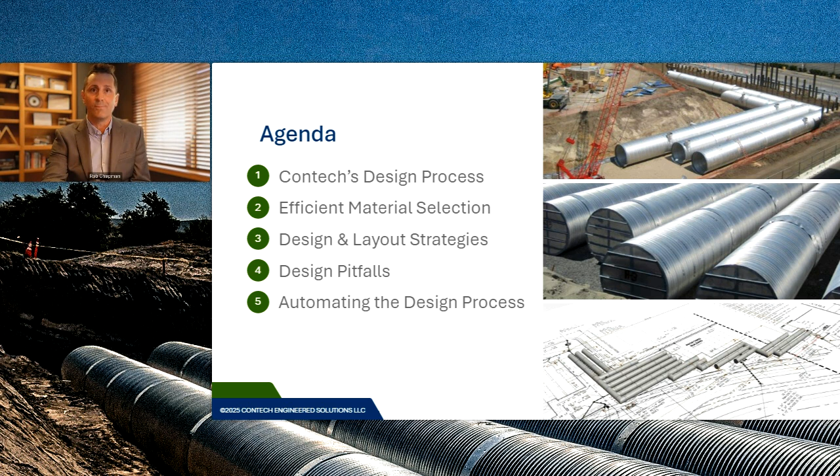Contech offers a wide range of innovative, flexible stormwater solutions engineered to solve your site's unique challenges and reduce long-term maintenance costs. From traditional BMPs to LID solutions, our ongoing investment in robust laboratory and field evaluations ensure a variety of solutions to comply with local regulations, so your projects get approved that very first time.

So the Contech difference. What is the Contech difference? First, collaborative design support. Stormwater management and infrastructure design require more than just selecting the right products, being quick about that. It requires smart, informed, engineered solutions that align with site conditions, environmental factors, and regulatory requirements. At Contech, our support begins long before the installation. We work closely with engineers and project teams to develop optimized designs that not only meet the project challenges, but also improve performance, efficiency, and sustainability.

Our team provides expert design guidance, helping engineers tailor solutions to unique site conditions, technical consultation, working through complex challenges with hands-on expertise and real-world insights, optimized engineering, ensuring that designs meet maximized efficiency, reduce costs, and compliance standards. We're committing to deliver the most effective solution for your project needs. Speed and accuracy in an industry-leading portfolio. So when your deadlines are tight, accuracy is critical. Contech delivers there. Our ability to provide optimized designs in a trusted product environment ensures projects remain on track while meeting compliance and efficiency goals.

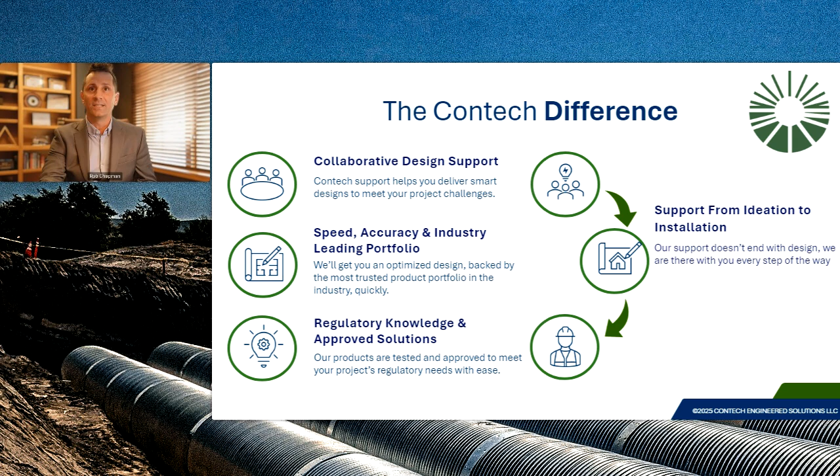So you can store water, detention, and infiltration a variety of ways. What are the benefits of going underground with your product selection?

While underground detention often does have a higher upfront capital cost than a pond, efficient underground storage can provide long-term benefits, such as additional parking or building space, driving your commercial returns over time for your clients.

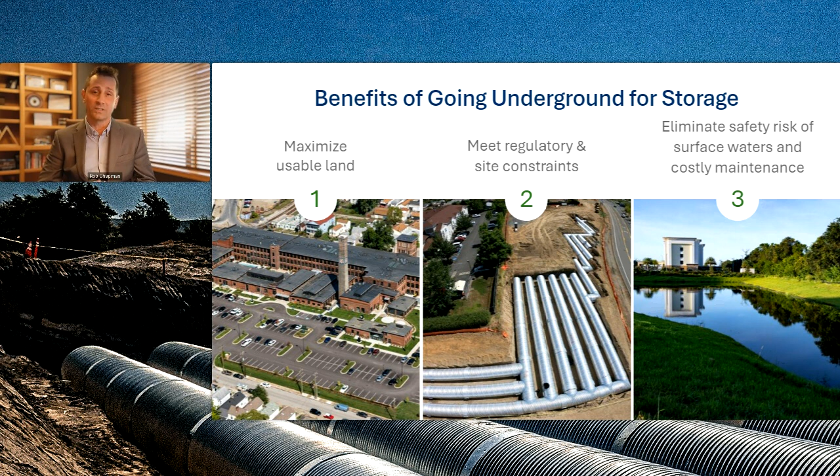It allows you to easily meet regulatory requirements and design around unique site constraints. And then it's a safer alternative to surface water, with a much more reasonable maintenance cost and schedule. Underground detention also means greener areas for parks and rec if you're not looking to maximize that commercial space.

So now we're going to get into efficient material selection and discuss our products and some key factors for consideration. When it comes to selecting the right material for underground detention or infiltration, there's no one-size-fits-all answer. These are the factors the team identified to make smart, site-specific decisions that balance performance, budget, and long-term reliability.

First, we're going to start with storage volume and your available footprint. Every site has different space constraints. Some are tight on surface area but offer more depth. In these cases, systems that can maximize vertical storage become incredibly valuable to clients, helping your volumetric requirements get met without expanding your site's impact.

Second, you have to consider site conditions: construction loading from the get-go, structural loads, traffic ratings, and depth to the water table.

And then on to cost and layout flexibility. We discussed upfront material price—that's always a factor. The ability to custom fit your system into an irregular footprint or constrained area can reduce complex site work and avoid expensive redesigns and timely process changes. You can plan around total install costs with efficiency.

Fourth is durability and service life. You want to choose a system and a product that's not only affordable today, but that's going to give you that performance for decades with minimal maintenance and no surprises down the road.

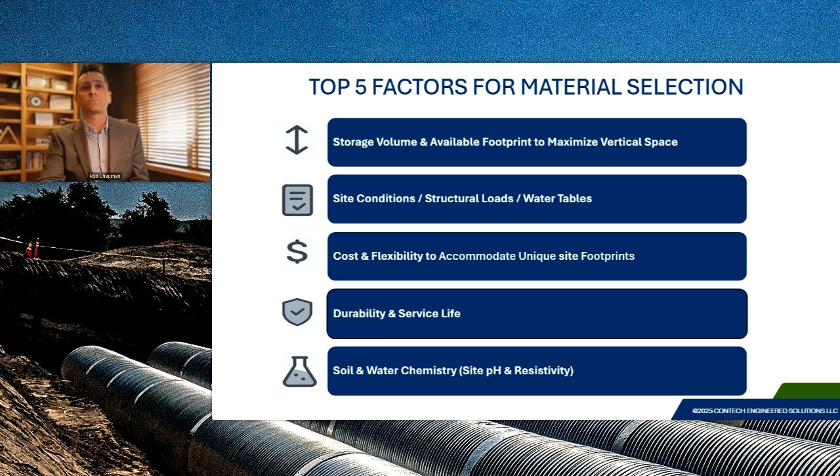So on to the products. Contech offers a variety of underground detention and infiltration solutions. We have concrete products, metal and plastic, and hybrid products for efficiency to solve a variety of site conditions and requirements, ranging from watertight requirements to infiltration requirements, shallow to deep, tight urban sites to high volume storage needs.

So we'll start with chambers, ChamberMaxx. ChamberMaxx is Contech's polypropylene chamber system specifically designed for shallow cover and space-constrained sites. A perfect fit for urban, commercial, and institutional projects.

Each chamber features a 51-inch span by 30-inch rise, delivering 75.1 cubic feet of storage per chamber—that 0.1 is really important. One of the key advantages of ChamberMaxx is its open bottom design, which supports runoff reduction, groundwater recharge, and volumetric control. ChamberMaxx is also a cost-effective solution for shallow applications.

And finally, getting to the structural stuff, ChamberMaxx meets ASTM F 2418, and supports HS20, HS25, and even HL96 live loading, making it suitable for traffic-rated applications without sacrificing reliability.

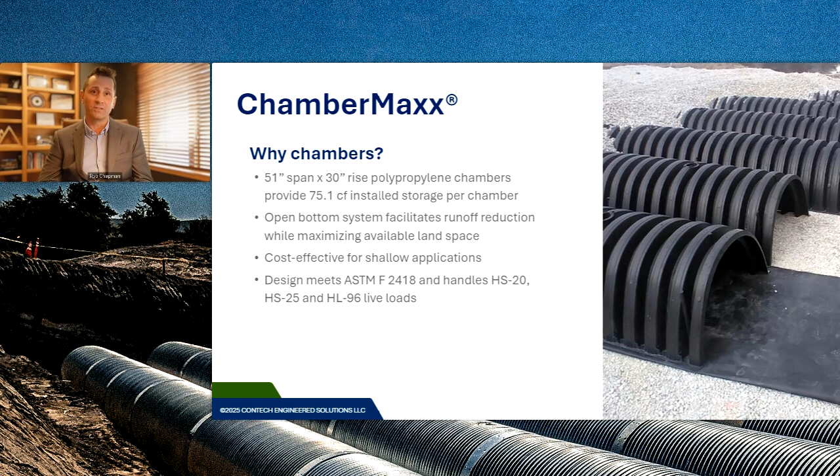And now on to DuroMaxx. So many of you may have used this in conveyance projects.

DuroMaxx is a standout solution when you need strength, durability, and watertight performance, especially in environments where traditional materials just don't hold up. I'll brag a little on CMP there. It starts with the steel reinforced ribs, which provide the structural backbone needed to support large diameters. We can produce from 30 inches all the way up to 120 inches. This allows DuroMaxx to handle deep burial, high traffic loading, and large volume conveyance with ease.

What sets DuroMaxx apart is its combination of strength and corrosion resistance. The HDPE shell encapsulating those steel ribs resists corrosive soils and contaminated runoff, making it a top-tier choice for industrial sites, urban fill areas, and projects where longevity in harsh conditions is a must. We'll talk about that in a case study at the end.

When watertight performance is non-negotiable in applications like rainwater harvesting or containment systems like glycol, DuroMaxx delivers. The bell and spigot joints are rated to 10.8 PSI, meeting strict standards for leakage and system integrity.

If you need to get even more critical with bottle-tight applications, we offer multiple joining solutions. Welded couplers have been around for a while, are still available today, and continue to be a trusted option for maximum performance. But for those who don't know, we're excited to announce the all-new Quick Joint, a major innovation we just made here at Contech and Quikrete that brings speed, simplicity, and security to DuroMaxx installations. This joint is very cool. It's engineered for both sanitary and storm sewer applications, and we expect it to become a staple in the market thanks to its ease of use and high performance under pressure. So DuroMaxx brings the strength of steel and the durability of plastic into a single system, and many of the design practices are similar to CMP with DuroMaxx.

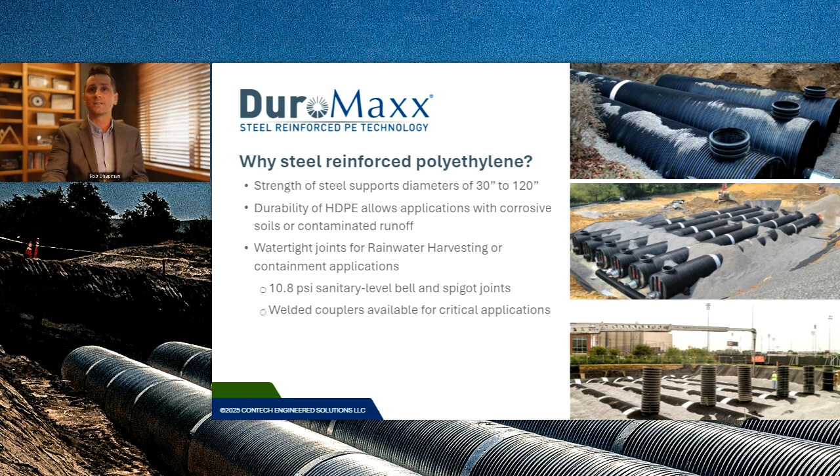Onto our concrete detention products. When space is at a premium, like in dense urban environments, Southern California, designing effective stormwater management can be a real challenge. That's where Contech's Urban Pond system shines. It's purpose-built for tight urban sites, maximizing storage in a minimal footprint. Whether you're working with a parking lot, a plaza, or a street, Urban Pond gets you high-capacity storage with concrete detention without disrupting the surface above.

Each module is 8 feet by 16 feet, and the system heights are customizable from 3 to 14 feet, giving engineers and developers incredible flexibility to meet site-specific volume needs without over-excavating or redesigning the entire plan.

In terms of structural performance, this is where concrete shines. It's just as versatile. With only 1 foot of cover, Urban Pond handles HS20 or HL93 loads, and with 18 inches of cover, you're getting that HS25 live loading requirement set. It makes it suitable for heavy loading in urban roadways or commercial developments.

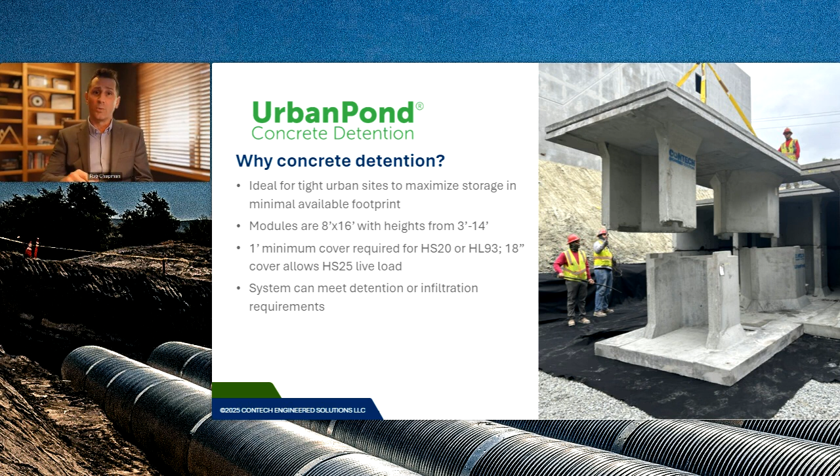And finally, Urban Pond can be configured for detention or infiltration. Depending on your site's hydraulic goals, if your goal is to slow runoff or recharge groundwater, Urban Pond gets you a reliable, long-term solution.

And then on to the old CMP, the new CMP, as we'll discuss in a little bit. Each product has its strength, and depending on the site's goals and constraints, there's usually a fit for everything. But when it comes to striking that balance between those 5 key factors we discussed—cost, flexibility, performance—corrugated metal pipe, or CMP as I've been referring to it, really stands out.

CMP detention and infiltration systems offer the widest range of sizes, shapes, and material coatings in the industry, which makes it incredibly versatile across all regions of the United States and all project types. So whether you're dealing with shallow cover, tight footprints in commercial projects, or aggressive soils, there's almost always a solution that fits, and fits economically. Let's take a look at why CMP is the go-to for engineers without worrying about compromising on design flexibility.

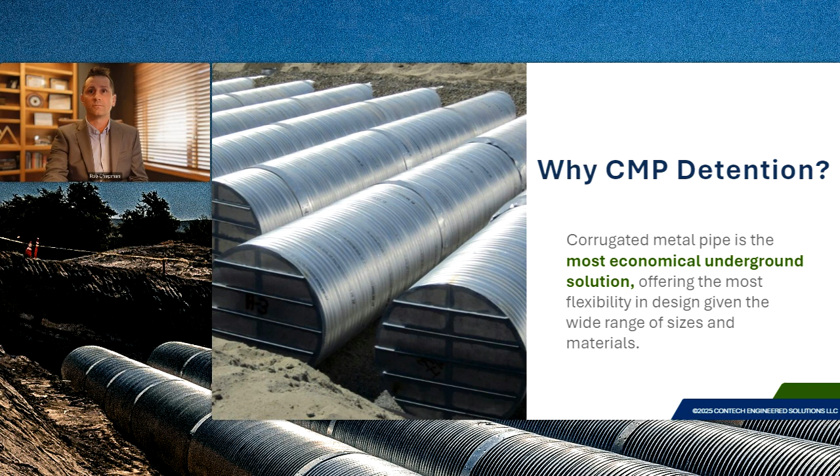Flexibility in design—when we talk about that for underground detention and infiltration, CMP stands out, especially on sites with tight constraints. You're going to hear that word a lot. And then there are competing priorities for land use, like green areas and commercial development efforts.

First, custom configurations are a major strength with CMP and also DuroMaxx. Systems can be fabricated to spec, so custom Ys, Ts, and elbows mean they can be laid out to almost any footprint. It gives us the ability to navigate around existing utilities and difficult easements. Secondly, there's a wide range of gauge and corrugation options, meaning you can design for a variety of site conditions and structural loading needs.

CMP can be produced in 12-inch all the way up to 144-inch in diameter and can handle anything from small urban systems to large-scale industrial warehouses and data center storage requirements. And then the flexibility continues with access risers, manifold placements, inlets, and outlets. So with CMP DuroMaxx, you're not limited to preset configurations. We can place access points, inlets, and outlets wherever is needed for inspection and maintenance, which helps with long-term system performance and safety as well.

And then outlet control structures such as orifices, internal weir walls, they can all be designed using our DYO software we'll get to. Custom configured in the system, you can avoid the need for external structures that are out there. So overall, the design flexibility that you're getting with our pipe products maximizes space, meets performance goals, and then reduces installation complexity while getting you that cost efficiency that you're looking for.

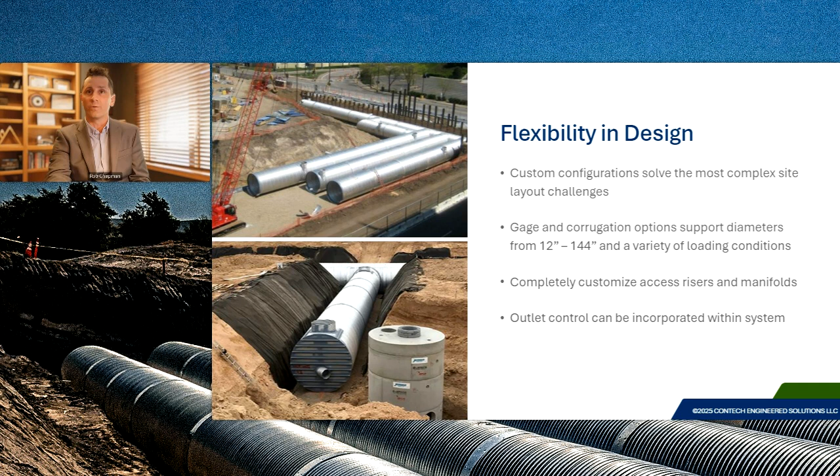So when it comes to material selection, it's not just one coating that's out there. The go-to is aluminized type 2, offers excellent long-term performance for most soil conditions. When you're dealing with more aggressive or corrosive environments, we will recommend going all the way to that polymer coated product if you're looking for enhanced protection, extended service life, that 100+ year range. So choosing the right coating ensures the system's not only cost efficient up front, but it's going to get you that durability and CMP you're looking for the long haul.

Many of you don't know this, but approximately 75 to 80% of the soils in the US are now suitable for aluminized type 2 metal pipe when it's used for underground storage and infiltration applications. In recent years, there's been a drastic shift. Many of you know that galvanized product that's out there. The majority of UDS designs now incorporate aluminized type 2 due to its enhanced performance.

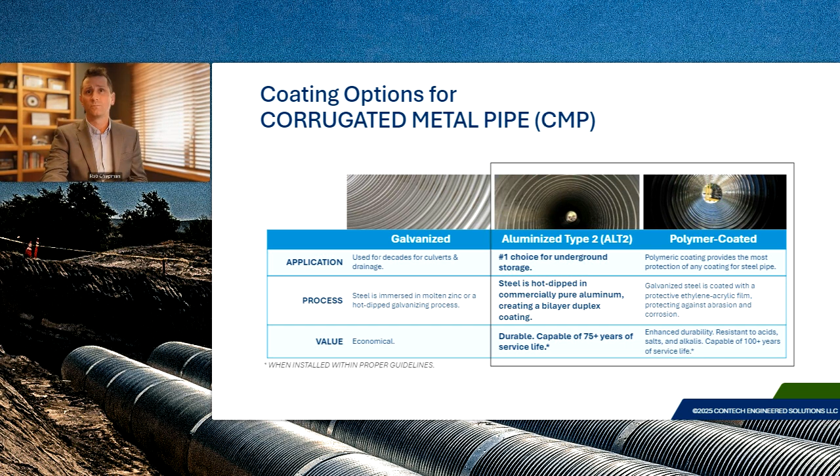And the last thing we'll talk about with type 2 pipe, it's important to clarify that it's not just steel. What we're really referring to is aluminized type 2, which has been proven for over 60 years through research, real world field performance, and a wide range of applications. It's been studied by national entities, and there's reports out there that our team can get you. So why is it so widely trusted? It comes down to that aluminum alloy coating, which provides superior corrosion resistance in acidic and moderately aggressive soil. Looking at a soil profile with pH between 5 and 9, and resistivity above 1,500 ohm centimeters, it's going to get you a strong, reliable solution.

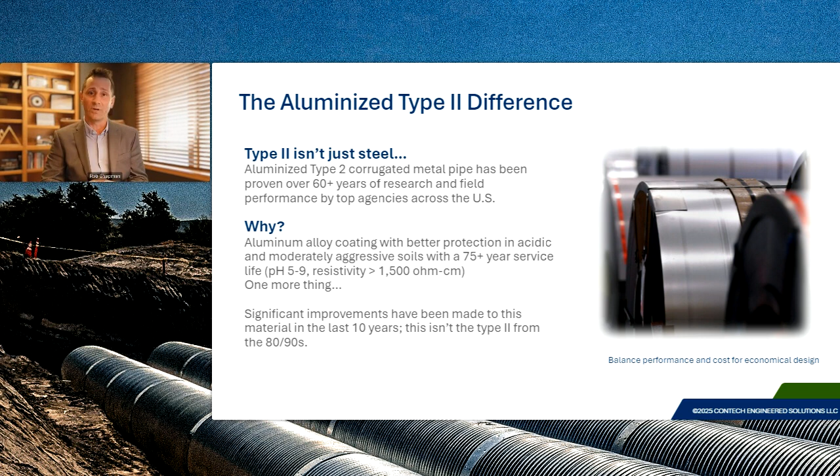One thing that many folks don't realize, even many here at Contech, is aluminized type 2 CMP isn't the product of the 70s, 80s, and 90s. Over the last decade, with technological improvements and quality control measures, suppliers have made significant coating improvements in quality, consistency, uniformity of the corrosion aspects, and forming. So the material properties are much different than they were a few decades ago.

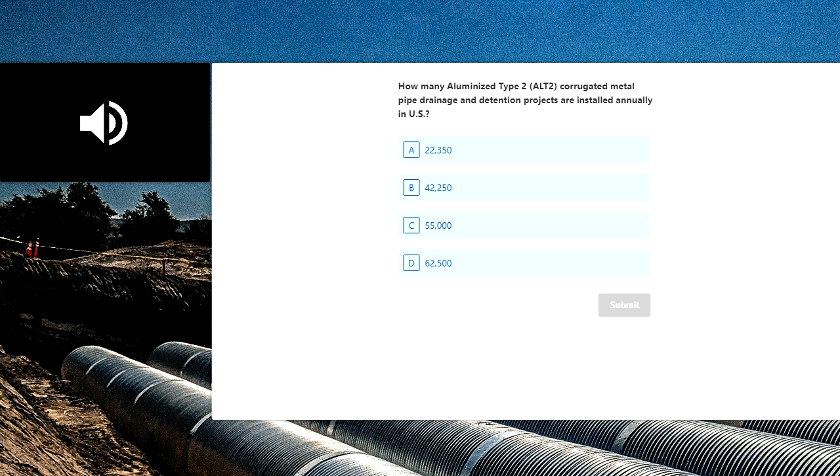Here's our first question. How many aluminized type 2 corrugated metal pipe drainage and detention projects are installed annually in the United States? Is it 22,350, 42,250, 55,000, or 62,500? I'll give you some time now to mark your answers.

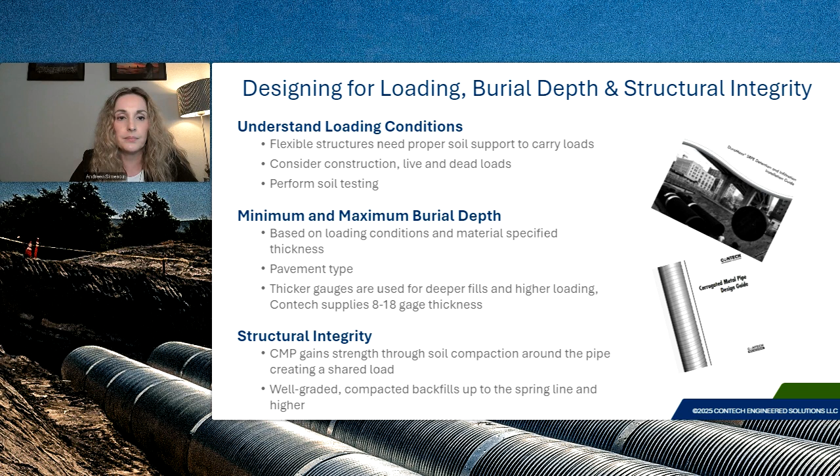The goal of any CMP detention system should be to maximize the vertical space available to minimize that overall footprint. This will reduce the material, the excavation, the backfill quantities, and the labor costs. Increasing the depth of the system allows for a smaller footprint while storing the same amount of water. The required volume is a fixed number that doesn't change, and it is based on local regulations, and designing a smaller system will always yield a more economical solution overall.

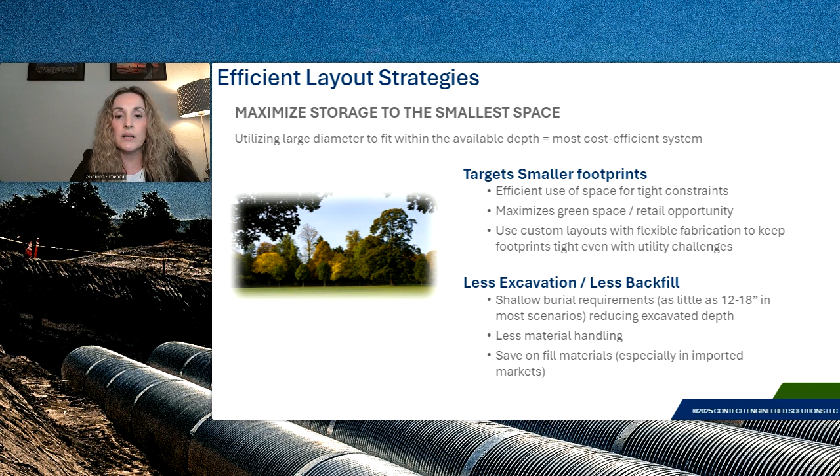The CMP system requires a minimum cover to withstand typical traffic loads, ranging from 12 inches to 18 inches, depending on the diameter of that pipe. You need to account for this minimum cover when designing and choosing the appropriate diameter for the system.

Doubling the diameter of pipe from 48-inch to 96-inch gives us 4 times more storage volume per foot of pipe. This provides significant cost savings per cubic foot of storage once you consider both the material cost and installation cost. This is a very important concept. Going larger means less material to ship and install, less excavation because of that smaller footprint, and also less backfill material.

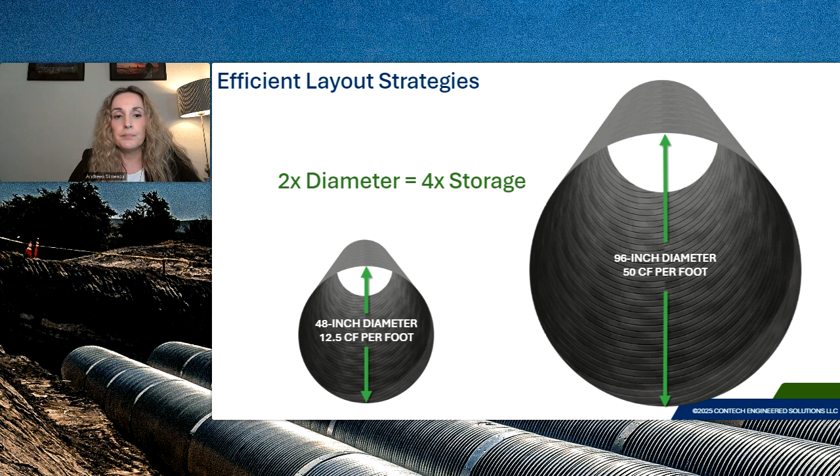Now let's go through this quick example where we are comparing 3 different systems: the Chamber Maxx, a 48-inch system, and a 96-inch diameter system, all designed to store some of the volume in the surrounding stone backfill. The storage volume requirement in this example is 20,000 cubic feet. We have about 10 feet of depth to work with and a footprint of 100 feet by 100 feet. As you can see here on the slide, the 96-inch system significantly reduces the footprint, which ultimately will also reduce the excavation quantities and stone backfill quantities.

Construction costs vary from region to region, but if you look at both material and installed cost, you will see the largest 96-inch system becomes the most economical of the 3. As the volume gets larger on projects, the savings will also increase, and you could see savings of up to 30 to 40%.

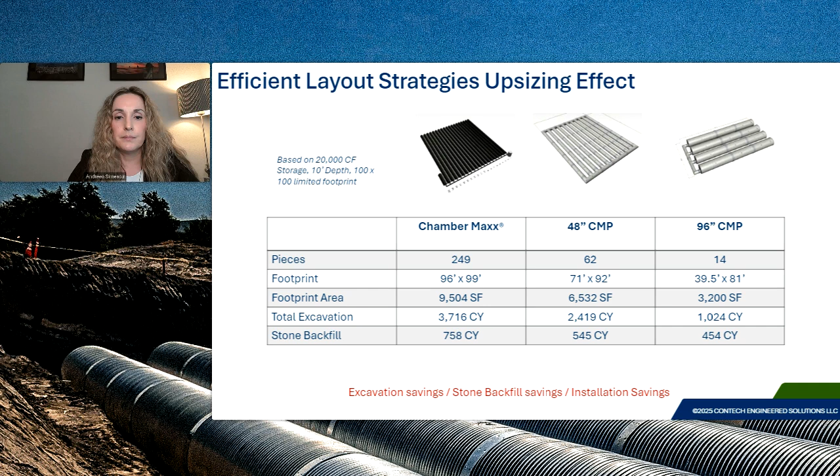Now let's go over some efficient layout strategies to use when designing with CMP. Designing with longer pipe runs is always more economical because you are reducing the number of fittings such as T's and elbows. So remember, long and skinny is the most efficient design.

Using a single manifold system with bulkheads at the other end is the most cost-efficient and easiest to install by the contractor. In large diameter systems, we recommend using smaller diameter manifolds to reduce cost and for faster lead times and installation.

You can also look at reducing the spacing between the barrels. If you do that, you can reduce the overall footprint of the system. Talk to your Contech stormwater representative to find out what is recommended based on the backfill material being used in your region.

Don't forget to add your inspection and maintenance access points by adding risers up to grade close to your inlets and your outlet. Also, eliminate structures - you can utilize these risers as inlets above the system. That way you are eliminating the need for additional catch basins on your site. You can also incorporate outlet flow control within the CMP system by adding an orifice plate.

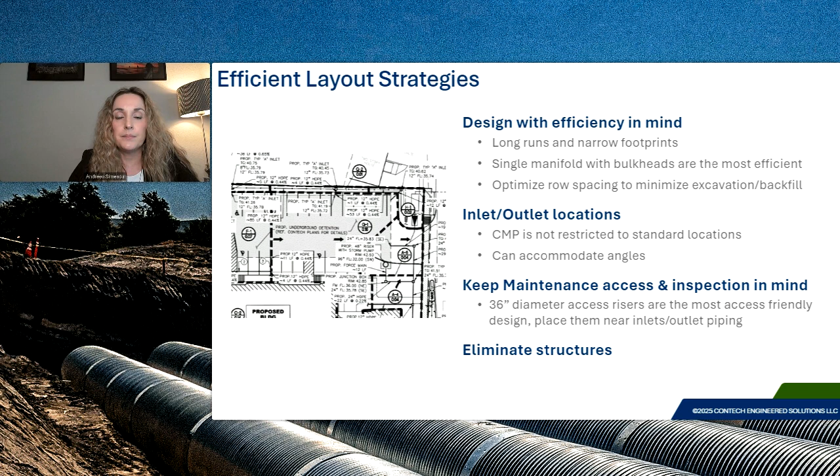When designing infiltration systems, you have to consider what the infiltration rate of the soil is. Most jurisdictions have a maximum drawdown time requirement, and our engineering team can help with that stage storage calculation and also the drawdown time calculation to ensure that requirement is met.

Make sure you choose the right stone backfill material that is free draining, angular wash stone with a certain particle size that will provide the void space for that volume storage. Please note that the industry standard is to use 40% voids. However, there are some jurisdictions that are more conservative and decided to reduce that to maybe 20 or 30% voids.

We recommend a geotextile layer around the trench to prevent soil migration and protect that stone layer. And also watch for high groundwater to ensure your system invert will be placed higher.

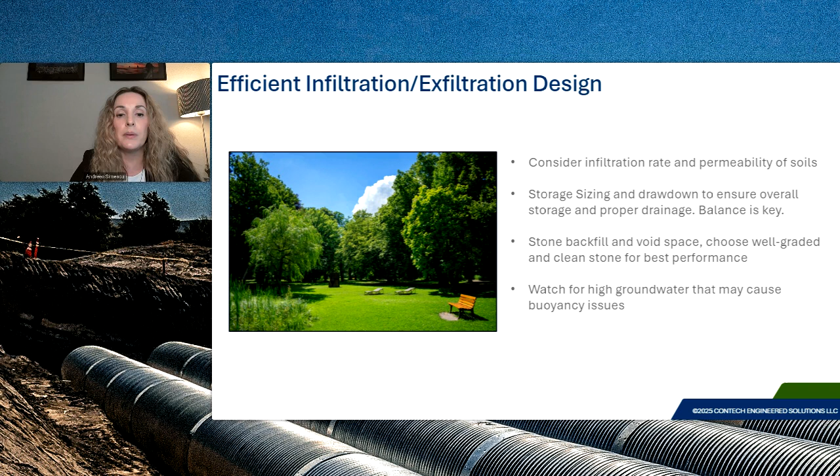When designing infiltration CMP, maximize your storage ability by adjusting your specified stone layers. CMP requires a foundation bedding layer material, stone that surrounds the pipe to provide additional volume in that void space. You can maximize your effective storage volume by counting the 6-inch stone layer typically placed below the pipe, which captures storage in the stone already being placed for backfill.

Additionally, in shallow cover situations, consider using more stone above the pipe to eliminate the need for an intermediate backfill layer between that CMP stone envelope and the finished grade base material. Stone layers can be adjusted in 1-inch increments, allowing you to further maximize your storage volume for your given footprint while eliminating that thin intermediate backfill layer. This makes installation faster and often more cost-effective.

The Design Your Own Detention System, the DYODS tool on our Contech Design Center, allows you to make these adjustments easily on your design by altering the inputs for the stone, as you can see on the slide.

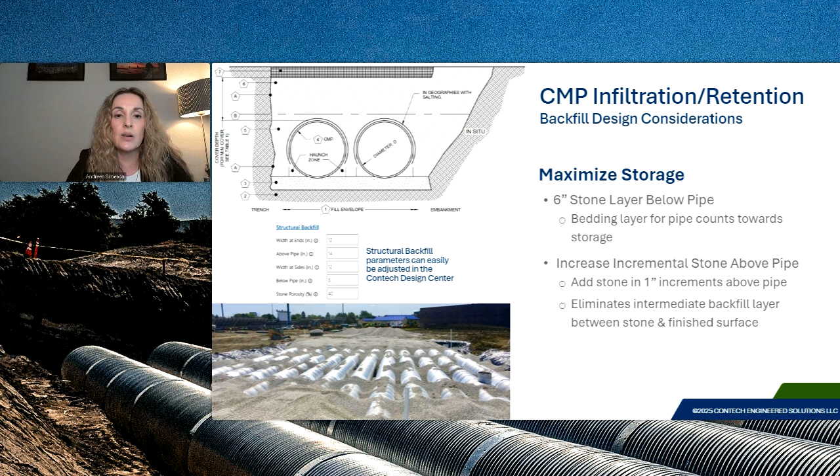Configured for detention, retention, or infiltration applications. In retention or infiltration designs, we use a specifically designed and tested Xfiltration joint that allows water to flow in and out of the pipe during and after storm events. In these scenarios, the pipe is backfilled with stone to take advantage of the additional storage capacity in the void spaces between the stones. We can use the Xfiltration joint for detention applications as well, where we have tight footprints or not a lot of depth and need to store a little more volume.

In a detention application, you would not use any stone layer below and place the outlet at the invert of the pipe to allow for the water to flow out of the system.

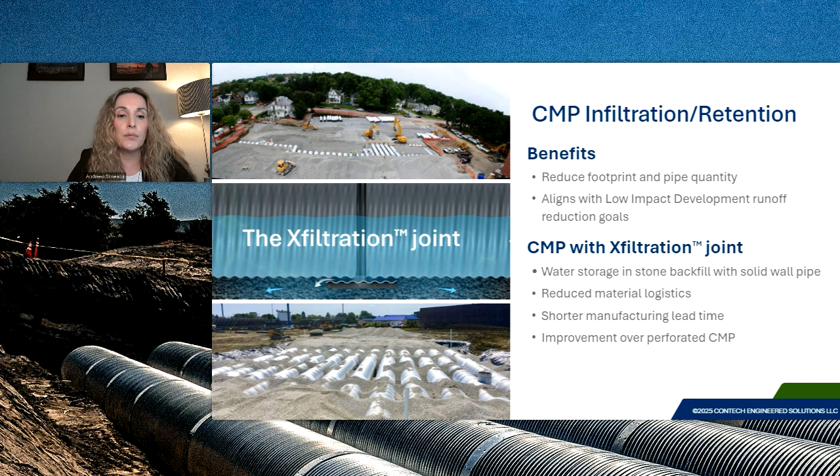Maintenance is important to protect the storage volume and outlet control structures. Here are some maintenance hacks you may want to keep in mind and consider when designing with CMP detention and infiltration systems.

Strategically place the access risers near inlets and outlet locations to make the inspection and maintenance process easier. Consider using baffles within your CMP to isolate sediment entering the system. This allows for simple single-location maintenance rather than full underground system cleaning.

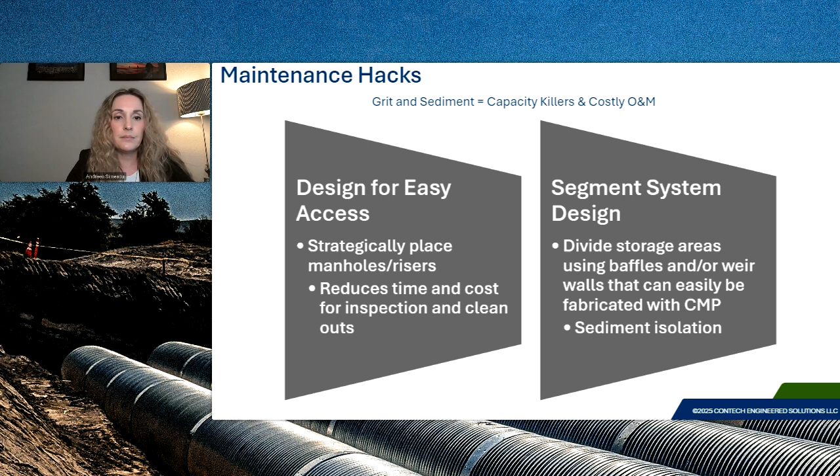Using a pretreatment unit upstream of a detention or infiltration system is highly recommended. By capturing pollutants before they enter the storage system, you not only increase the life of that downstream system, but can also maintain a small treatment unit rather than a large detention or infiltration system.

Pretreatment upstream of infiltration is especially important. Many infiltration systems are designed such that the stone voids account for part of that storage volume. If there's no pretreatment, the stone voids will become clogged with sediment, which will reduce the overall storage volume available that you designed for. And how do you get that volume back?

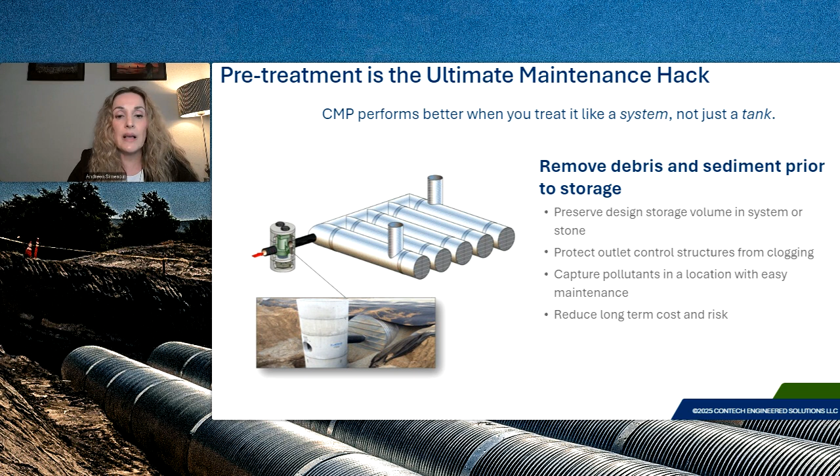Now let's go over some common design pitfalls we see and want you to be aware of when designing underground detention systems. Forgetting that additional temporary cover may be needed when heavy equipment is used during construction.

Planting trees can be a beneficial practice for stormwater management, but it's important to remember that roots from trees can potentially damage the system if there's not enough separation. You may want to consider using root barriers to minimize the risk of root damage, and also select the right species of trees. Soils information.

It's very important that you have appropriate information for the soils on your site. Non-H20, H25 loading requirements may include fire truck loading or garbage truck loading. Adjustment to the gauge of the pipe or the cover required may be needed to accommodate these larger loads. Also, systems located close to a building or structure - you have to make sure you are not placing that system in the influence zone from the building foundation, so make sure you have enough space between the building and the underground system. High groundwater and buoyancy: whenever the water table level is above the invert of the pipe, the potential for flotation exists and should be analyzed in the design.

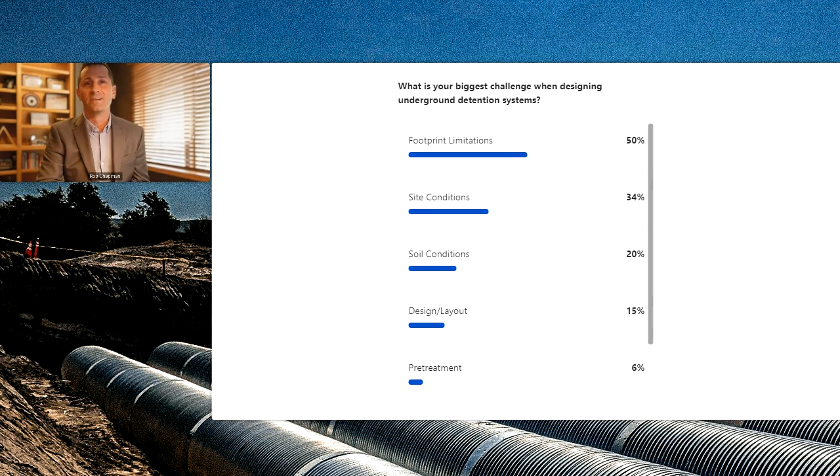I'll turn it over to Rob to continue on and explain why there's so many redesigns in our industry, I guess. So next we're going to move on to some case studies and wrap up the end of the presentation before we get to some Q&A and some demos of the tech stuff. We're going to show you 2 case studies highlighting some very unique projects we've had here at Contech.

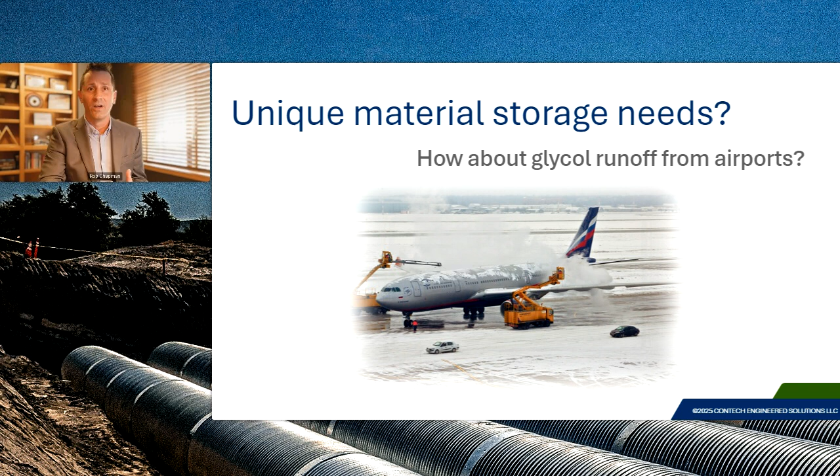So underground containment isn't always about stormwater. I referenced some harsh chemical storage out there. There are unique underground storage applications growing across the industry, particularly on the airfield side as airports expand their runways and terminal projects. So we're going to discuss a case study using DuraMaxx SRPE for storing large amounts of glycol, a corrosive, harsh material, as I referenced.

So every product has its place. We talked about that before at the beginning - when dealing with harsh chemicals rather than stormwater, SRPE is an excellent solution. So it's becoming a staple in airfield side civil infrastructure projects, such as the case with the Des Moines reclamation tank design.

So DSM needed to store a crazy amount, almost 2 million gallons of glycol runoff. For those not familiar with glycol, cold weather climates use it for the deicing process, and they needed to do that with a 100+ year service life.

So the team went in and used a 120-inch SRPE product. We were able to keep that storage containment area footprint small, meet the aircraft loading requirements, and provide the watertight solution needed for that airfield solution.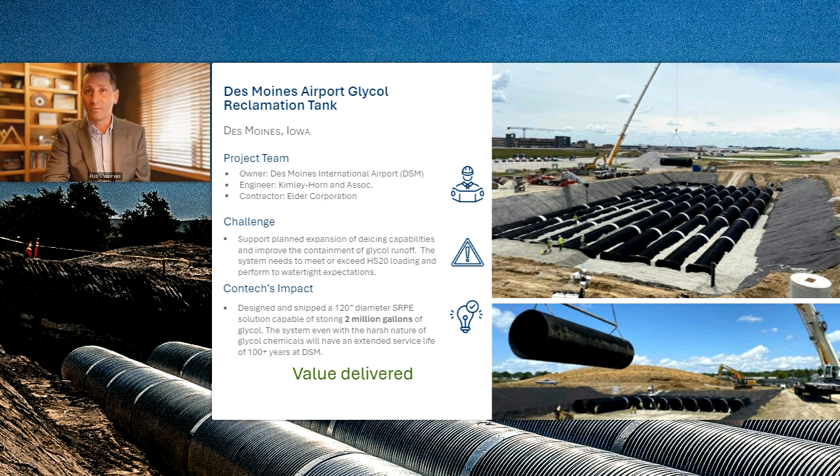So this case history is one of the many unique ones you could find on the library. If you go to the learning section of our website - I forget what it's exactly called, but it's newly updated, super easy to find stuff in there - you're going to find the demonstrated performance of DuroMaxx, the containment characteristics it can offer, and its strength profile as well. So now on to the tech portion.

So many uses of our design center since it was updated about 2 years ago to what I'm calling V2. It's our next generation online design platform built to meet the ever-evolving needs of today's engineers. What makes it stand out from others in the industry is that it's been developed entirely in-house by civil engineers for civil engineers - people who actually work in the industry make up our software development team. They understand the real-world challenges our customers face.

So it's going to support 2D and 3D design environments, allowing engineers to visualize and design a wide range of Contech products, from our pipe and stormwater systems to bridges, all with precision and clarity. The interface is super intuitive, powerful, and customizable, so you can get those unique footprints with our products you're looking for. Users can input site-specific parameters and adjust configurations in our products.

My favorite part: receiving red flag warnings. Not everybody likes a red flag, but when you're designing something that's outside of best practices, not in the best interest of the product, it helps you avoid issues before they arise. The software is going to do that.

It is cloud powered, so you don't have to download anything or work with your IT folks to get something installed on your system. Updates happen automatically. It's web-based, so you can access those designs from anywhere. And it has built-in virtual collaboration.

So post-COVID, during COVID, this thing became huge with the collaboration aspect we built into the software. You can share projects and designs amongst multiple projects with your key stakeholders, allowing you to review in real-time - review the models, review site plans, comments - really streamlining decisions for this whole process. So it's bringing you speed, accuracy, and collaboration all into one space.

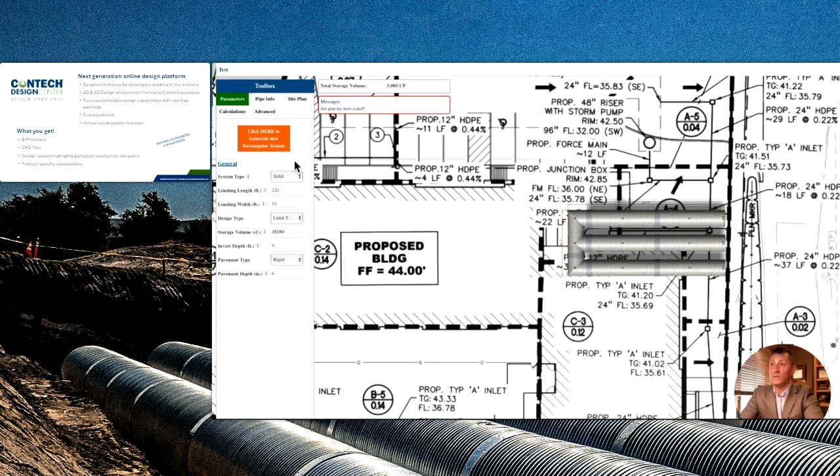So I went ahead and did that, left it as solid. We do have solid, perforated, and exfiltration options, but for detention we'll leave it checked there, and then I'm going to hit click new generate system, and there we go.

So now we're just going to have to move this off and start the design process. Using this move all function with the tool off to the right, we're going to drag this near an inlet and start the design process.

If you recall from the previous slide, we had some tight footprints to work with, some easement challenges, underground utilities. So we're going to move some of the storage off to the left underneath these parking spaces, add some manifolds, and then reroute some storage, so we're hitting that 38,180 that we're looking for.

Using the select function, we're going to grab some pipe, delete it from this entrance area, and then relocate it over to here. Holding control and clicking all these pipes over here, they will turn red. We can delete them. Refresh all is going to put those bulkheads on automatically.

Now we're going to go ahead and add the elbows, T's, and manifold. So add the left elbow. We can use the R function key to rotate, and it'll automatically snap in place. We're going to add a T here, again rotating and then snapping in place.

We're going to add a right elbow right there, snapping in place. All right, so now we're going to extend some storage over to here. Going to delete this corner piece and add another T.

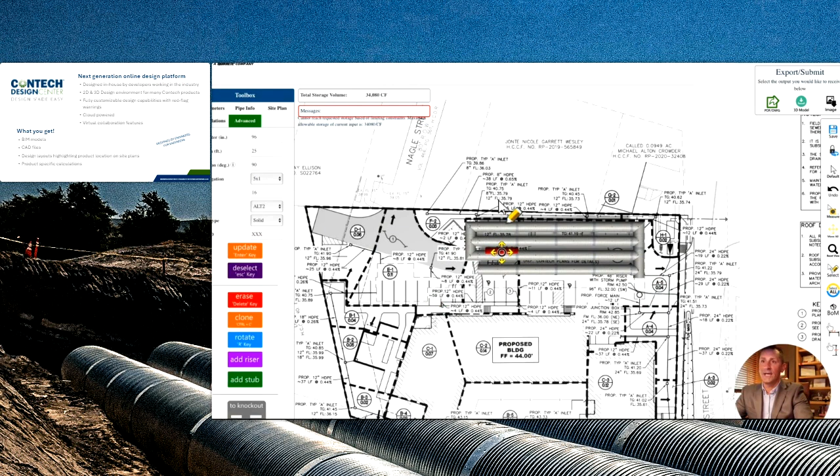And now we're going to go ahead and add another pipe and reroute some of this storage. Using the knockout function, we're going to go ahead and add an elbow off here and continue that storage increase off to the left here underneath those parking spaces.

So using the select tool, we'll grab this pipe and go over here to the knockout function. I'm going to do a 12-foot knockout, hit OK, enter. Now we're going to go ahead and add a T using the rotate function. Enter. Now we're going to come off with an elbow.

Rotate that. Add it over there. And now we're going to bring that pipe all the way to the left here.

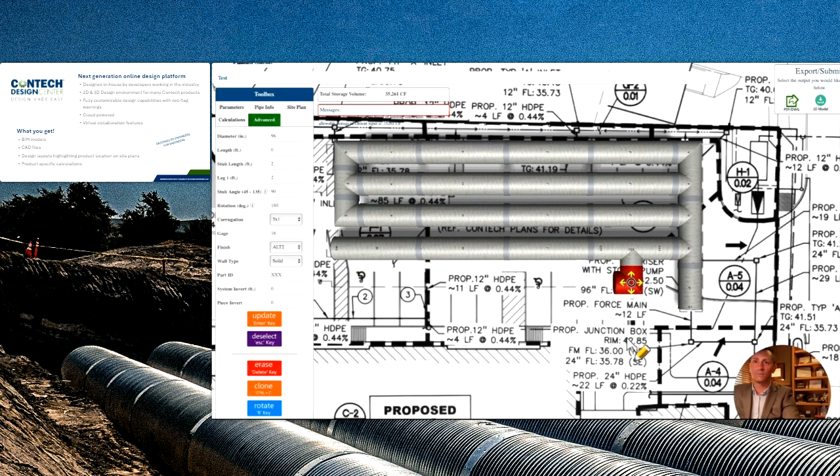Okay, so in the interest of time, I've sped up the design process so we're further down the way with our completed layout. So the things that we missed in order to speed this process up - we did get made aware that we had some higher quality backfill than initially expected, so that allowed us to change the spacing on this project to 30 inches, bringing that spacing in closer.

Knocked out some sections off here on the top portion of the system. You can see I spoke to adding that elbow here and then carrying that extra storage required off to the left here. So just using that add function - the add pipe off to here, then we reduce size here due to some utilities, then increased again back to that 96-inch size, added some risers, elbows, T's, and manifolds. So you can see just how truly unique this design is.

And then we capped it off by double checking where all the inlet and outlet portions are on this particular project and making sure access risers were put in the actual needed location. So all in all, when we wrapped up this design, you can see we ended up with just a tad more than our target.

38,654. There was no stone storage on this project with it being detention. You can see the loading, the footprint that we worked with on this particular system. So pretty advanced with what we're able to do with footprints.

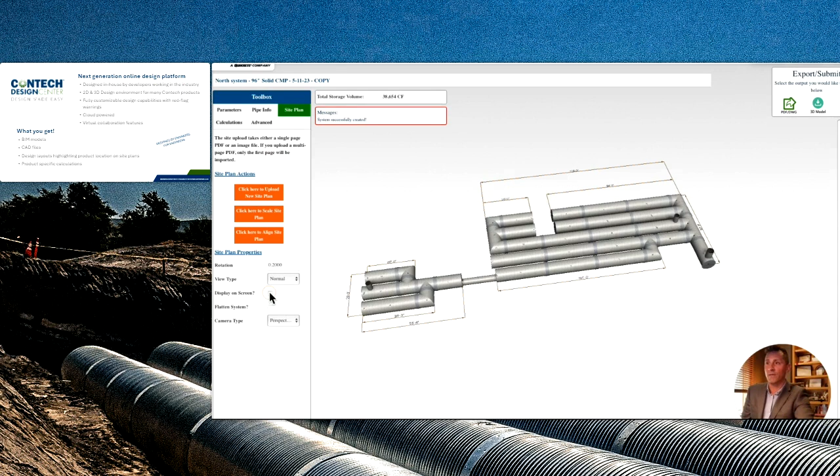If you want to check out some additional features here quick, we can actually turn the site plan on if you want to add further dimensions. So anything you add from the tools off to the right - X dimensions, Y - they're going to carry forward to that CAD file, that PDF. So you can go in and make sure that you've got all those critical dimensions on there when you're looking at your site plan to make sure that everything lines up.

And then you can actually go ahead and add transparency if you want to go that far, get pretty fancy with it. The important thing here to notice is the final steps in the deliverables that you're looking for, yourself and your client. So top right here, 3 output options for you as a user, so you can take a snapshot of the system's orientation however you have it in the design center.

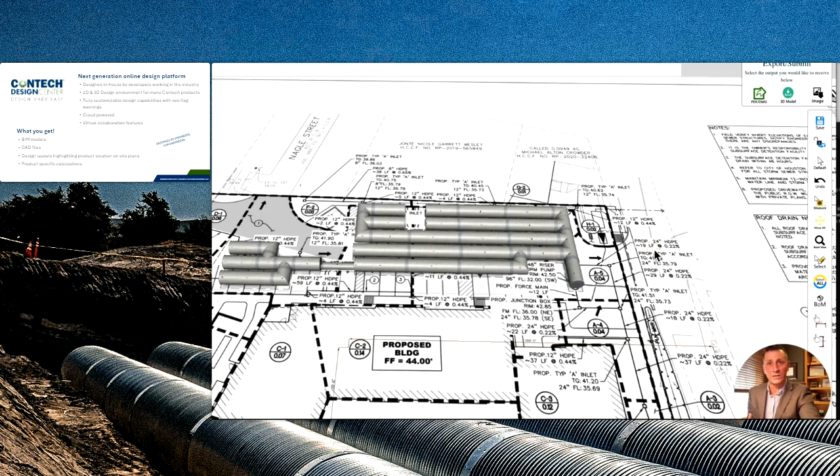If you're looking for a BIM model to drop into other programs, that's going to be right here. And then if you hit this PDF DWG function, that's going to finalize the design process. You'll see a step-by-step process of what the cloud system's doing, and then you're going to get deliverables - your CAD files, your stage storage amounts, site plans, layouts, and a few other things straight to your inbox, usually within 2 to 3 minutes.

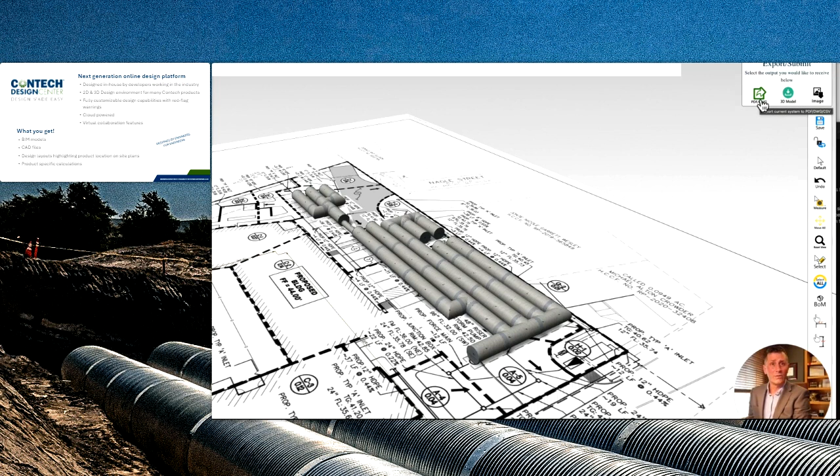I saw somebody asked about fire truck loading and other construction loading tables. So you're going to get standard details with all those 3D models that depict what we're recommending and studies in that area. So this New Hope housing project down in Houston is the result of that DYO project.

So the contractor was able to install this with a lot easier installation methods. And then the site got the benefit because it got 100% of that storage it needed without some complex multiple revision efforts. So this project also followed best practices in the industry for anything underground storage, detention, infiltration related.

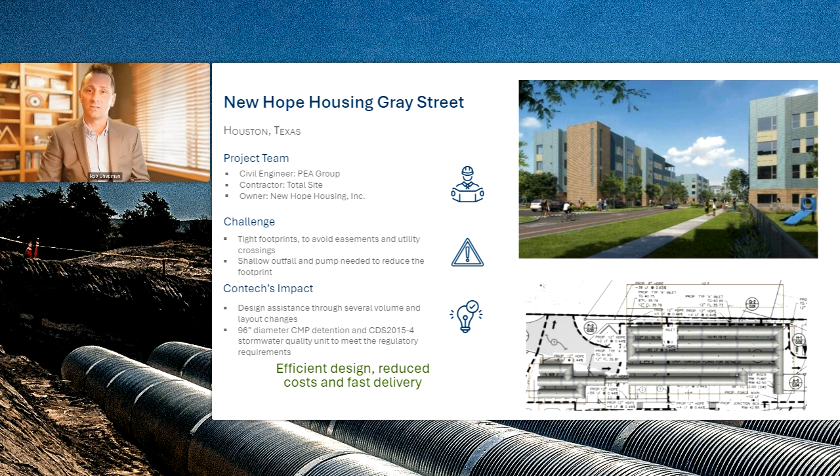It used a 4-foot CDS pretreatment unit coupled with what we call the treatment train leading into that detention system. The 96-inch CMP coupled with a shallow outfall and then a pump really significantly reduced the footprint needed for this, just under 40,000 cubic foot system in a tight commercial space out there.

So wrapping things up, mastering underground detention systems - it's not about just picking and relying on one product and running with it every project you have. So multiple options are out there in the industry. It's about understanding applications and then choosing the right solution for the job.

And that's where Contech delivers. You see the options that we have. We offer the depth and flexibility for design. Our internal SDE team, stormwater consultants, they can design for a variety of conditions out there, constraints and objectives. So moving on, customization - that's been a theme throughout this presentation. It is your ally. Thoughtful layouts can unlock real cost savings for your clients, streamline both design and construction timelines.

So constructability is a thing in underground detention. You can make contractors' lives easier, owners' lives easier with maintenance effort without compromising performance in your designs. And then getting into the maintenance effort, don't overlook long-term ownership with your clients for any of the products we discuss here. Having that maintenance conversation early on isn't optional. It's essential going forward, so you're not just designing for today.

You can't get that stone storage back when sediment gets into it unless you're digging stuff up. You're building trust for the life of your system and the owners on the projects.

And then finally, use the tools available to you. Technology like the Design Center helps you deliver high quality, professional results for your team, your clients, and for your reputation. So at the end of the day, great design is intentional, efficient, and forward thinking, and we're here to help you lead the way in that area.

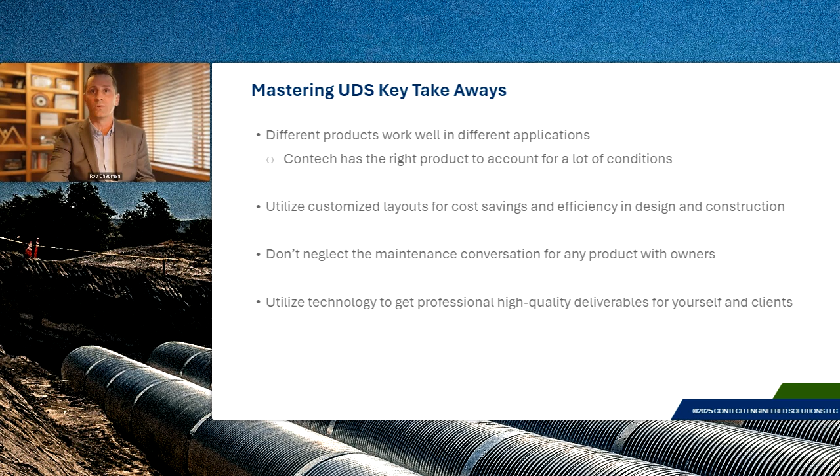And then finally, before we get to the Q&A, Contech is bringing more than just products and partnerships here. We bring an entire ecosystem of resources designed to make your job easier, more effective, and streamlined. It starts with our team of local engineers. We have a team of engineers and regulatory support for every zip code in the United States, Hawaii and Alaska included. They can provide project-specific guidance, regulatory mapping, and hands-on expertise when you need it and how to go about it. And then the suite of tech tools that we just talked about.

We have our standard product design worksheets if you're not looking to get into layout and design software. The design centers we just went through are all built to streamline the design, approval, and installation effort, improve accuracy in the use of our products, and really speed up decision making.

And then for inspiration and real world proof, I talked about the case studies like the DuraMaxx New Hope Housing Project, that new section on our website. Case studies, PDH articles - they're just a click search away, very intuitive. You could search by market, product, or application, find relevant practical content to help you with your projects and move forward with confidence if you're unfamiliar with working in a certain market, application, or product. So no matter what stage you're at, planning to post-construction, we're going to help you with the resources that we have.